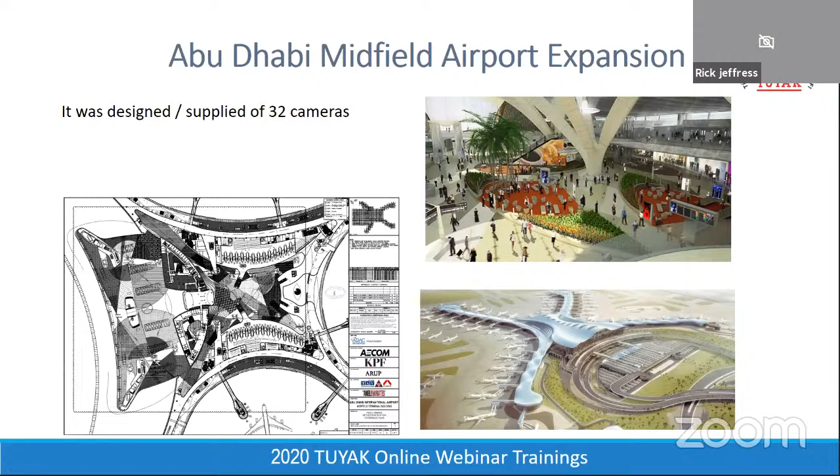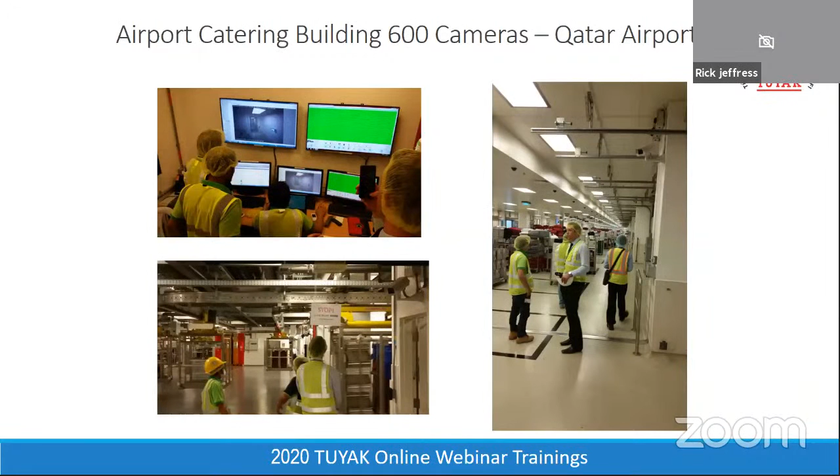In New York City, we have a high-rise complex called Hudson Yards. It's a 13-building high-rise complex. We have FIKE video analytics cameras in the first two buildings, about 650 cameras, all in high ceiling, large volume mechanical equipment rooms. We're starting to design the third building that's coming up next.

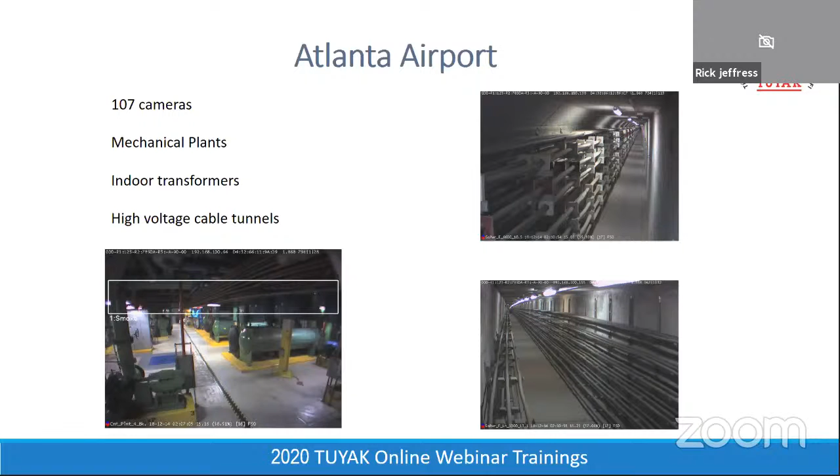The Atlanta airport has a tunnel system underneath the airport. We have 107 cameras monitoring underneath the airport in these electrical tunnels, as well as their boiler building. So video analytics in tunnels works very well. With video analytics, we're monitoring a reference background, using changes in light level to monitor for smoke or flame. Tunnels are very good applications because it's a very stable environment—no people moving around, no windows, and we can see a great distance in these applications.

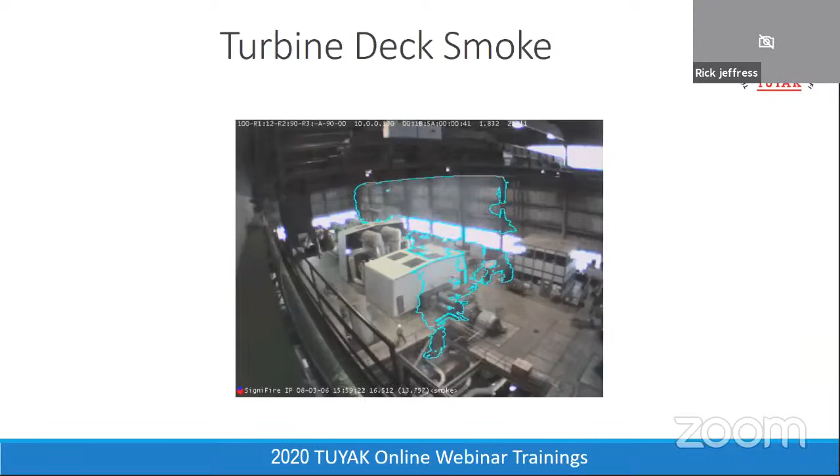This is an example of a smoke event. Down under the turbine, some oil was caught on fire or heated up. The smoke rises and is detected, and it's all represented with the blue outline. This is oil being burned off of an engine. So generator rooms are a very good application, and engine rooms on ships are a very good application for the technology.

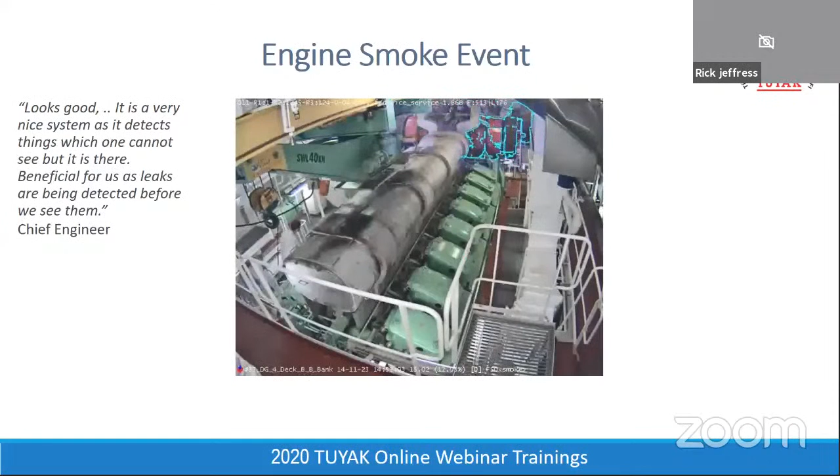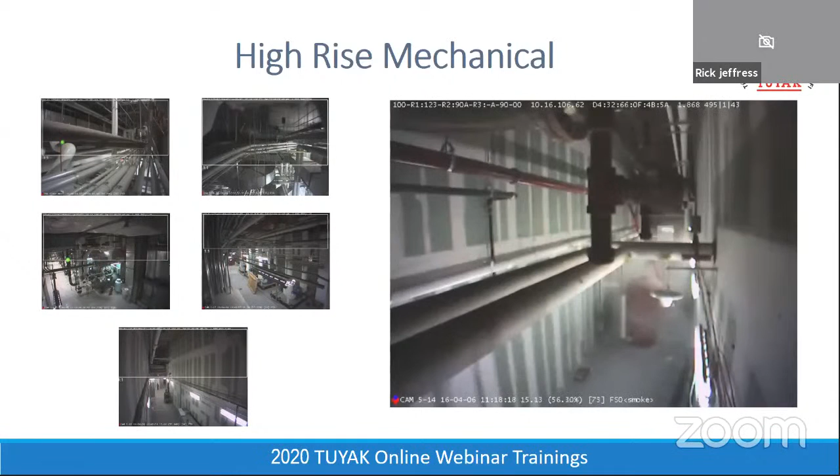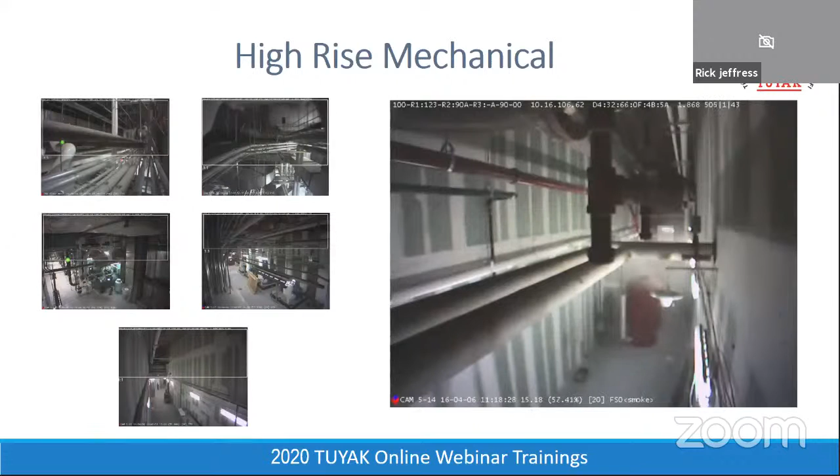What we do is create alarm zones within the field of view of the detector. Those alarm zones are represented in the small pictures, you can see the rectangular white rectangles. Those are alarm zones. So the system tracks smoke everywhere in the field of view, and when the smoke reaches the alarm zone, the system goes into alarm. The reason we do that is to avoid false alarms from people and objects moving in the image.

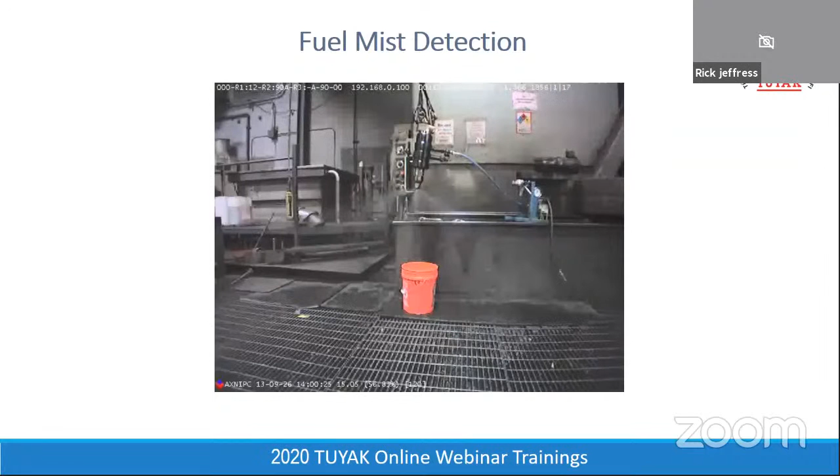This is an example of oil mist, being released from an injector from a large engine. You can see that the oil mist is clearly indicated with the blue outline, just like smoke.

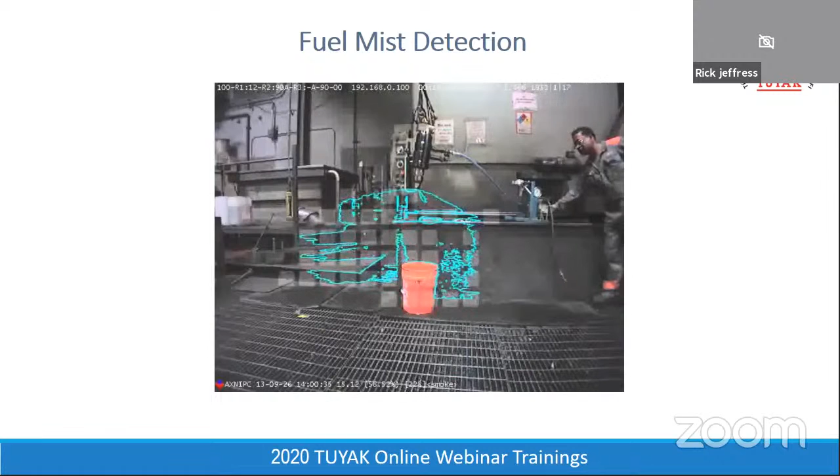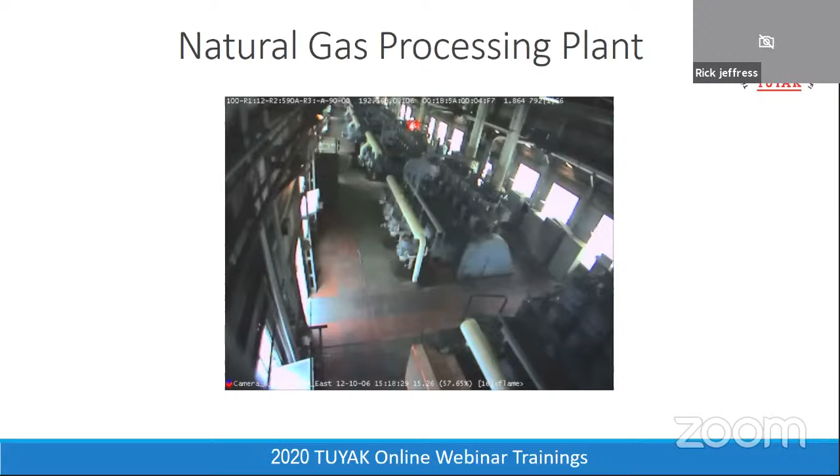This is an example of flame detection. The way we detect flame is by looking for slow changing brightness and flicker from a flame. The flame detection is represented by a red box, and you can see the word flame on the bottom of the screen.

In our case, we have two lenses. We have an 8mm lens, represented in green, which we'd use in tunnels and narrow areas. We also have a 2.8mm, or 82-degree field of view lens, for large areas.

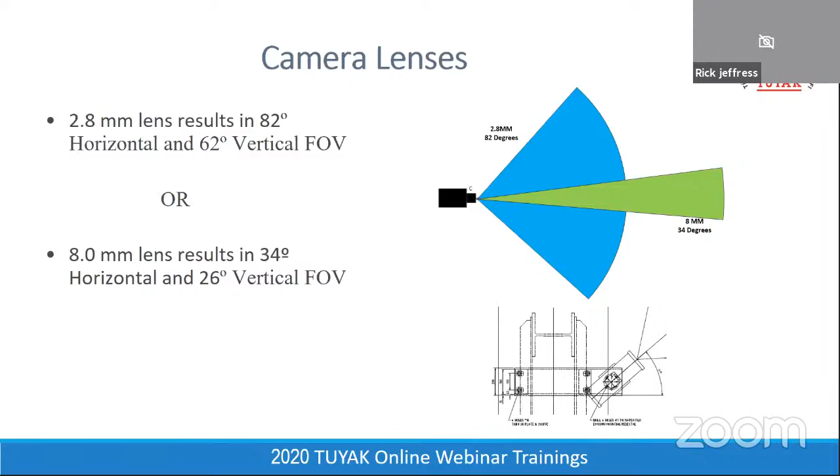The cameras are connected easily to a fire alarm panel, so any fire alarm panel can be used. There's 24 volts DC powering the cameras, and monitor modules monitoring relays on the back of the cameras by the fire alarm panel. Since there's video, it runs down through Ethernet, through an Ethernet switch to an NVR where it's recorded, and the live video is displayed through a computer screen. So this system would be an approved system.

We have UL and factory mutual approvals for these devices. There's also an ISO approval that's coming out soon. So this would be approved cameras.

Very similar to any other installation as far as 24 volts DC to the detector and monitoring alarm and trouble contacts on the detectors. So the alarms that are received are from flame, reflected flame, smoke, which is also used for oil mist, and motion detection is also enabled on the detectors.

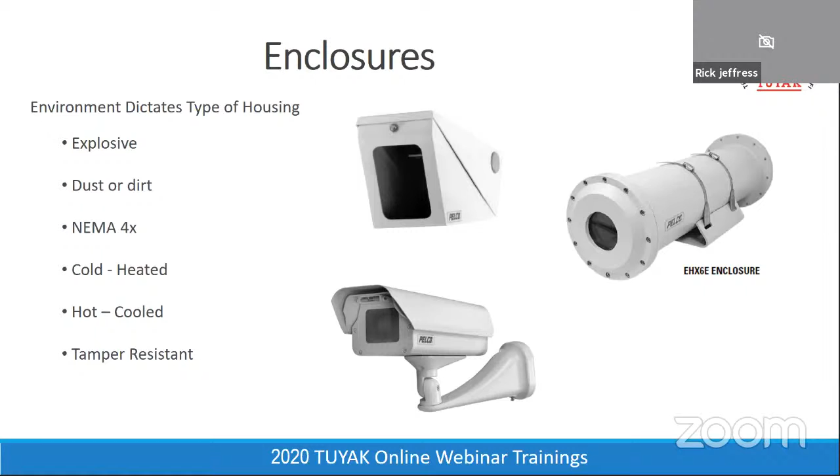Another system is where the analytics are server-based, so you have a computer or server with the analytics software monitoring video from a camera. Most systems use cameras that are ONVIF compliant. ONVIF is a global communication standard for IP cameras - it allows a standard so that the server software and the camera can communicate. Most IP cameras on the market are ONVIF compliant, and you can run an analog camera through an ONVIF encoder to do the same thing.

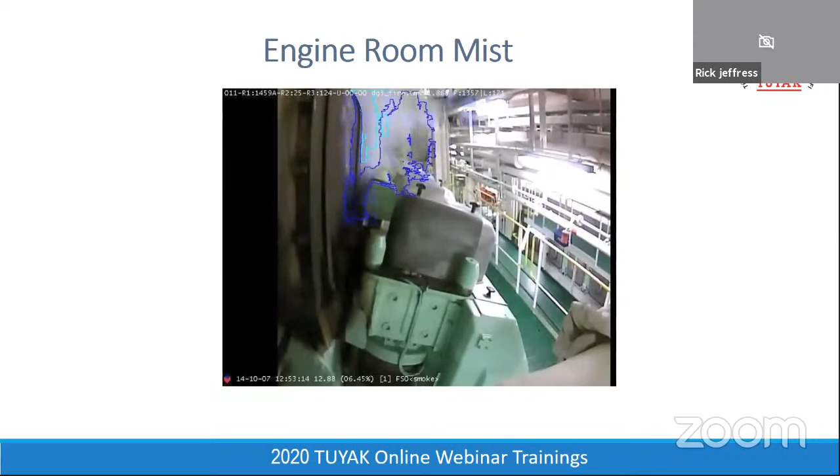For video analytics server-based systems, you have existing off-the-shelf, maybe security cameras installed. Those security cameras are monitored by a standard server, and video is displayed on large screen TVs or a computer. You would have an interface computer that's running the video management software.

If you'd like to add video analytics to an existing installation, we add a video management or video analytics server. The video analytics server is programmed to monitor the specific cameras - it's just connected through the Ethernet. The video management software for the video analytics is installed on a computer, and we also install a relay that's powered over Ethernet on this network.

The video analytics server monitors the video from the cameras. When the video analytics sees oil mist, smoke, or flame, it sends a signal to the relay. The relay will operate and send an alarm to the monitoring location. The video management software for the video analytics system is usually running minimized in the background. When there's an event, that software will pop up on one of the displays, and you'll see the video analytics overlay representing the detection.

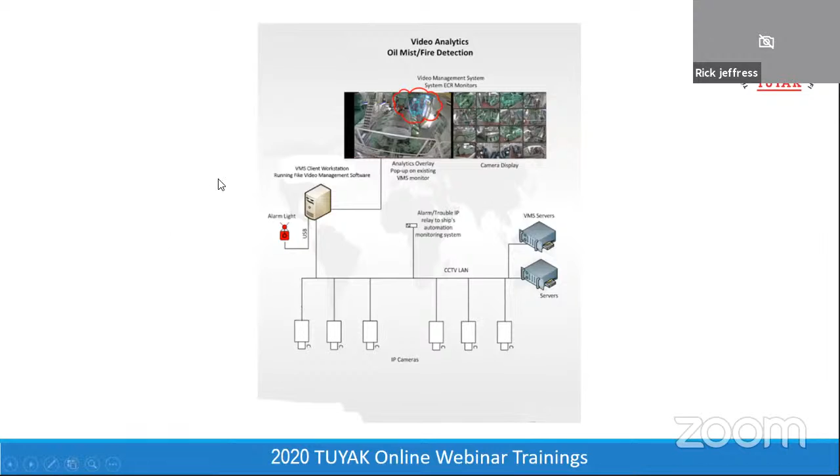So when we're designing a system, we have a layout of a building. We have the dimensions of the area. And then we usually start in the corners to follow the walls.

So we have the lens I showed you earlier, 82 degrees field of view. It's very close to 90. So we'll start in the corner and follow the 90 degrees of the walls. We'll go out to about 30 meters and have our coverage area for one detector.

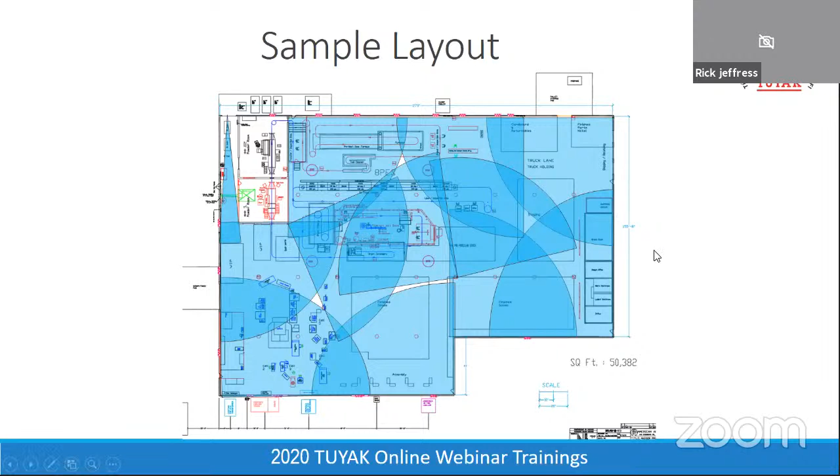So once we have this design, we know the quantity of cameras, and we can determine how the size of the NVR should be.

FM Global is an approving agency, so they approve video analytics. UL is another American approval agency. And ISO has a standard that will be released soon, which will also be used to test cameras. The ISO will also give you guidance on installation. So there are various standards, UL 268B, FM.

So we've done some comparative testing with video analytics compared to aspirating fire detectors, spot, smoke and heat, beam detectors, and linear detectors.

In this case, the detectors were mounted above the fire. The ceiling was about 6 meters high. The video analytics detected 88% of the time faster than the other technologies. The aspiration detection detected all of the fires, but was first to activate only 6% of the time. The video analytics detected all the fires and was first 88% of the time.

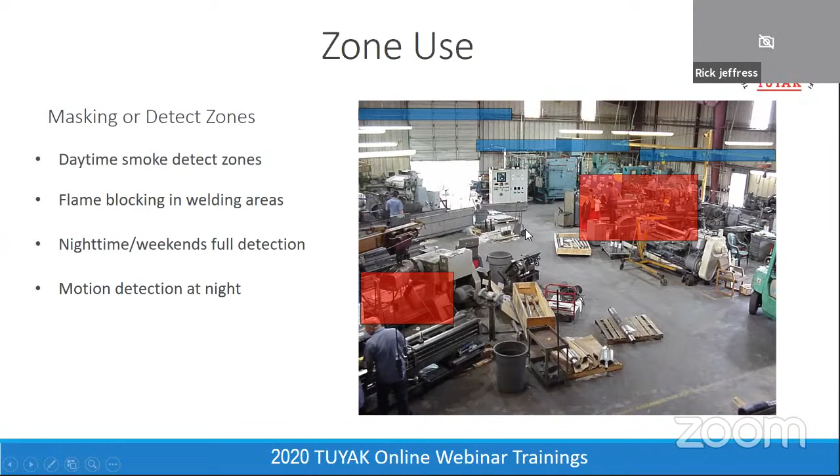So there's an infinite amount of applications for the alarm zones. It just depends on what the field of view is and what the activity in the space is, as to how we set up the alarm zones.

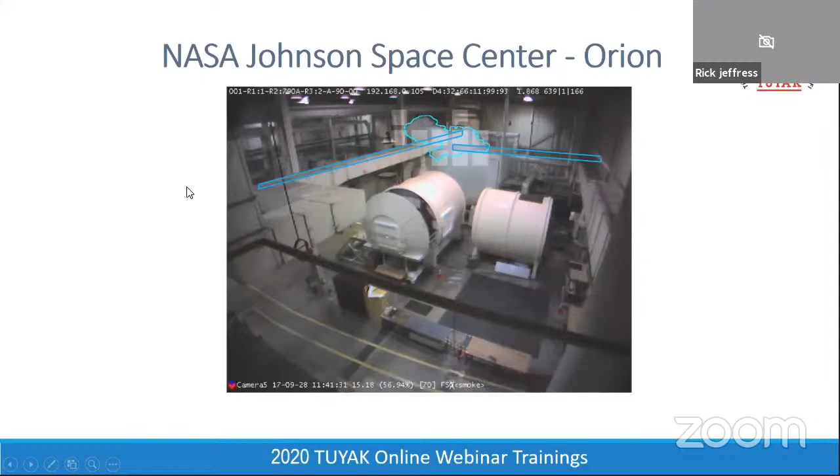So considerations: we'll look at what in the space is going to catch fire, and where we have issues with potential false alarms.

With video analytics, we need to be concerned about people or objects moving close to or in front of the camera. So when we look at an area, we'll determine where to put our alarm zones, usually above the equipment and above activity and people.

We'll also look at any lighting. We do not use video analytics outdoors because you can't control the sunlight, the shadows, and it's very dark at nighttime, obviously. So we only use video analytics indoors.

We recommend they're used where there are no windows. If there are a lot of windows in a space, we would likely suggest another technology, because with video analytics we need a stable background, a stable reference of colors and contrasts that we can monitor and then look for changes in that field of view, recognizing those changes as smoke, oil mist, flame, or reflected flame.